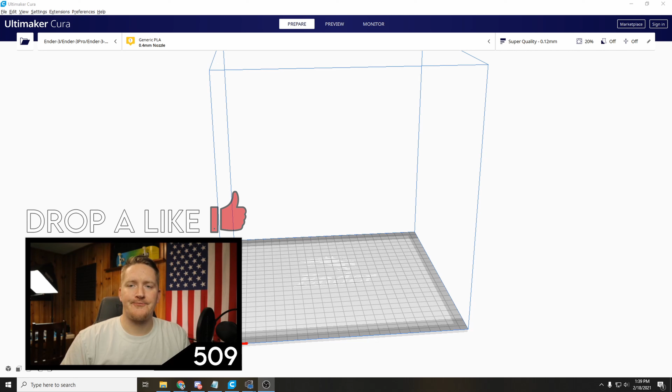This video is geared more towards beginners, people that are just starting out 3D printing and haven't really used Cura. So I'm not going to be going into the technical settings, and I'm not doing a deep dive. I'm just going to show you the basics of how to get going.

If you're brand new to 3D printing, the way it works is you get an STL file, which is a 3D model or 3D print file. You bring it into Cura, a slicer program, and Cura slices it into a gazillion little lines basically, which creates a G-code file. Then you take that G-code file and put it onto your 3D printer via your SD card, and that's how you make a 3D print.

So Cura is the slicing software that we use. It's a very popular software. There are other slicer programs out there, but this is by far the most popular one, so that's why I'm going to be showing you this one today. We'll go over the basics.

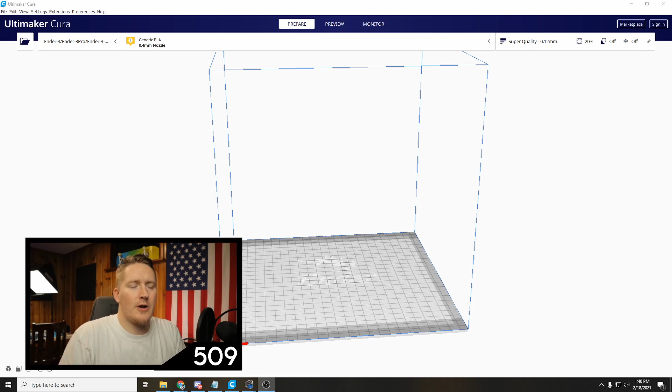The first thing you want to do, if you don't already have it downloaded, is download Cura from their website. It's right here, I'll have this linked in the description as well. It's called Ultimaker Cura. The most recent version as of recording this video is 4.8. It's good to stay up to date on the most recent version, because they're always adding extra features and updates and things that are definitely needed.

After you have it downloaded, I've already got it downloaded and installed. This is what it'll look like when you open it up. You'll more than likely have to set up your printer first too, so it should take you through a walkthrough process. But if you haven't done that yet, you click right here, click Add Printer.

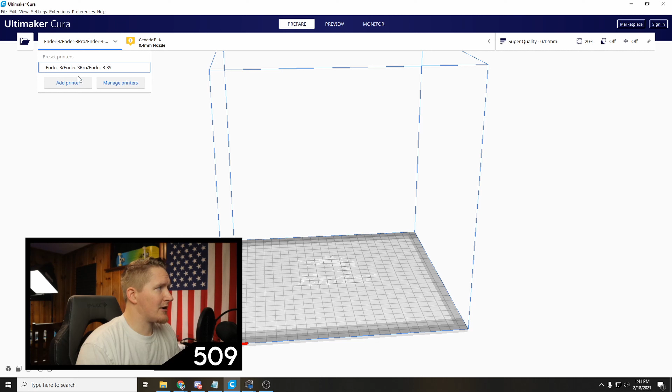Right here, you don't have to add it to the network. On the bottom tab, add a non-network printer. We can dig through this list and find it — there's a gazillion different brands already made out. I'll show you for Creality, the Ender 3 V2.

There was the Creality, I just saw it right there. So find your Creality, Ender 3, Ender 3 Pro. If you're using the Ender 3 V2, this is most closely associated with the Pro, so go ahead and select that.

We're going to call this Ender 5 actually, because I already have a 3 in here. You can change the printer name right here, so we will call this Test Printer. You can name it whatever you like. Go click Add, and it should have a few more settings.

If you selected your correct printer, it's going to have the correct dimensions already put in here. So this is the correct bed width and height and whatnot. It's rectangular, this is all set up correctly already. The extruder, the filament is 1.75.

Does it have a nozzle size in here? I don't see the nozzle size. The G-code flavor is Marlin. Yeah, that's correct. So if you select your correct printer, all of these settings will be correct. It's got a heated bed.

If you did not find your printer on the list, say you have a printer that's not as popular, and you couldn't find it in that list, just Google your printer settings — the printer bed size, their build plate, if it's a heated bed or not — and then enter those settings. But if you found your printer on the list, which you more than likely did, it's already set up. So you click Next, and now you're in Cura.

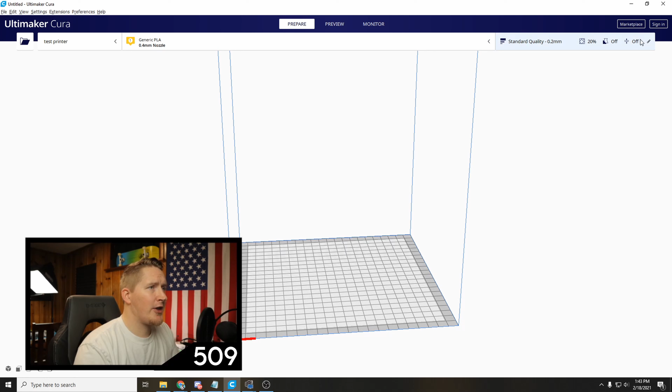The only thing I ever change is my settings over here. So we have our printer selected here - that's my original printer, and this is the new one we just made. If you have multiple printers, you can see them listed there.

This is your nozzle size and your material selection, so you can go in here and select the brand of filament you have. It's best to just leave it on generic PLA and set your nozzle size to the right size.

In Cura, up here in the settings, this is what it's going to look like for you for the most part when you just start off. If you're just starting off 3D printing, it's already a lot - there's a lot going on, very overwhelming. Cura does a good job of having these settings already pre-set up pretty good. You really don't need to tweak them until you get the basics figured out and understand how everything's working. I'd honestly recommend just leaving it like this.

So the profiles here, this is basically your quality. The higher the number, the larger the line width is. This makes your prints bigger, the detail is less noticeable, and it prints faster - it won't take as long.

The lower you go, the higher quality you get. So if you're printing something small, like a miniature for Dungeons and Dragons or something like that, it's totally fine to use a small nozzle resolution - excuse me, layer height - a small layer height, because you're going to get more detail out of it. It doesn't really affect the print time since it's going to be quick anyways. You're not looking for a giant print to take forever.

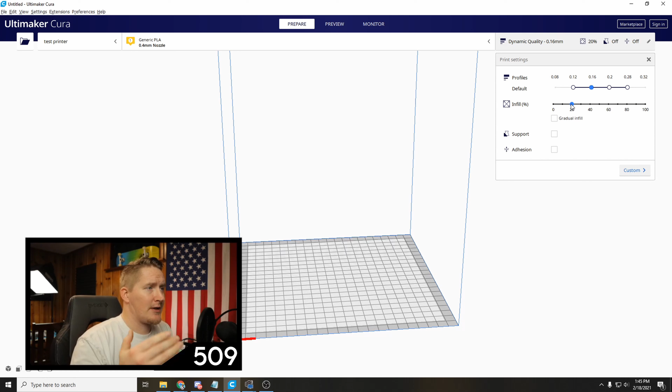So if you're just starting out, 0.16 layer height and 20% infill is totally good. Then comes the question of supports.

If you click supports, this is going to basically - well, I'll show you that in a second here. So if this is what you like, let's grab a file.

If you haven't downloaded something yet, we would go to Thingiverse and search for what you want. I've already searched for a calibration cube - this is a good thing to print right off the start. You click download files here, it shows you a little advertisement, and after 5 seconds it starts downloading this.

After it's done downloading, we click on the download - oh, my camera's in the way - click show in folder, and I put it right here. I'll right click and click extract all, extracting it right here. This brings up this, which is what almost all files look like when you download them from Thingiverse. You open this up, and this is your calibration cube.

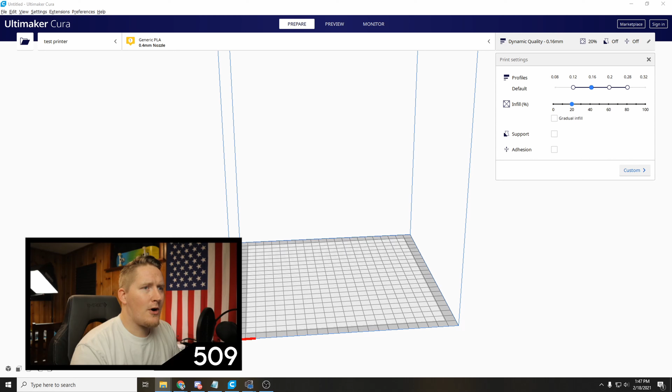I'm going to move this off my screen and bring Cura back up. All I'm doing is dragging the STL file and dropping it inside Cura, and that automatically loads it in there. Now you can see we have the option right here to slice the file. We would set - you can use your mouse wheel to zoom in and out, and right click to spin around the object.

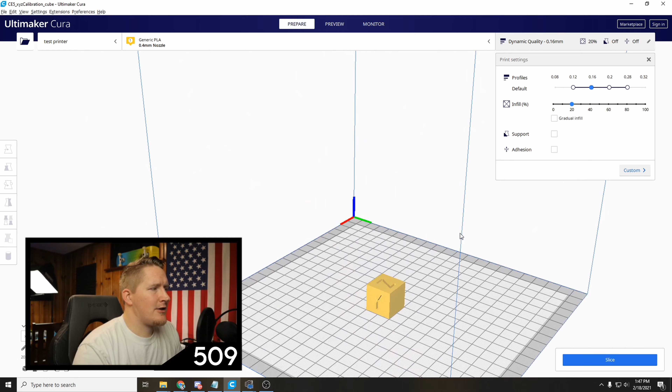And that's basically it. You can hold your mouse wheel and drag side to side. So say we're going to print this test cube. I've set it to 0.16, I've got my infill set to 20, and there's no supports needed for this, so we're going to leave supports off.

You would click slice. After it slices the file, you can see it tells you the time, how long it's going to take here, how much filament it's going to use. Well, excuse me, you have to set this in your settings if you want to see how much filament it's going to use, so I'll show you that real quick as well too.

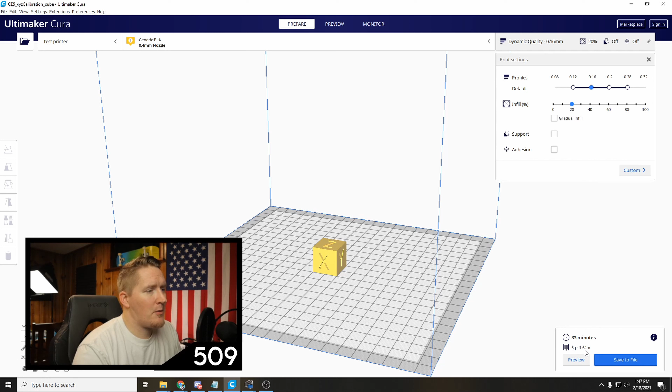So if we go to settings, configure settings visibility, profiles, no, where's it at? Materials, excuse me, here it is. So we go settings, configure settings visibility, materials.

Under materials here, you can set what the filament, it looks like it's got a default in here. Oh no, I didn't update this, excuse me. So it's already got a default. I just recently switched to 4.8 Cura, and it looks like it erased all my information in here. So you can change your filament cost.

I believe you can change this to dollars. I could have swore I have in the past. It's set to euros right now. Anyways, you add up your filament weight.

So you'd say a roll of filament, 800 grams, I think. Why isn't it allowing me to change it? There we go. So a normal big roll of filament is 800 grams. I don't know why it won't let me change those settings. Huh. You can change these, I'd have to mess with it for a second.

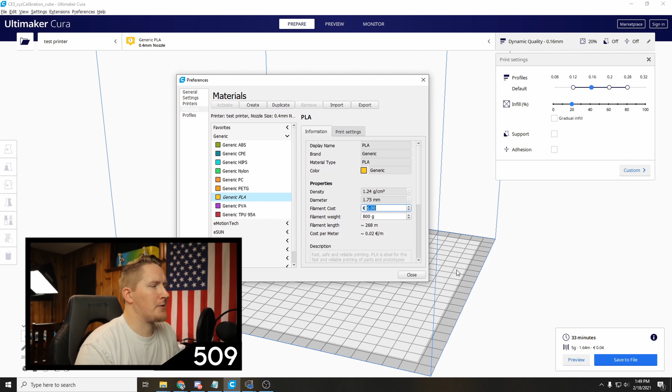That's not what this is about, sorry about that. You can change these settings though, and it'll give you an accurate representation when you slice a file down here of how much filament it's going to cost or take, the amount or the length of filament.

And then what that costs to you. So basically, you buy a roll of PLA, you figure out what it costs, what the weight is, you enter that information in your settings there, and then this will give you an accurate representation of what that's actually costing you.

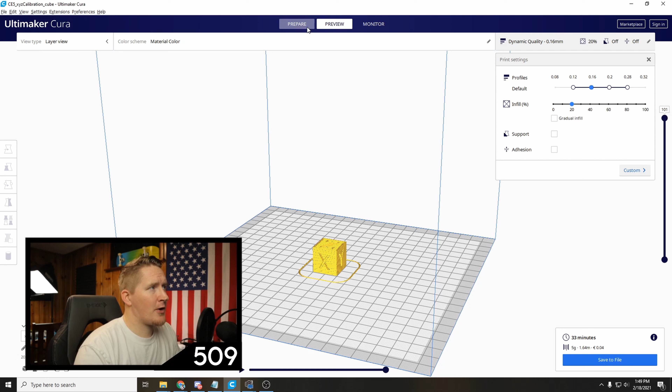So anyways, we've sliced this file, and we click on preview, and you notice up here it's changed the menus that we have. So prepare allows you to mess with the settings and change it. Preview obviously is what we're looking at now.

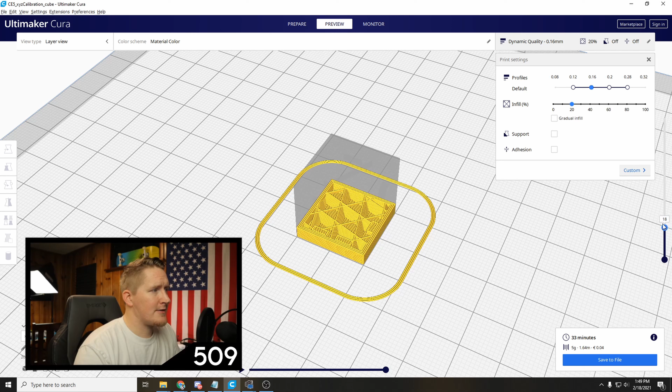So in the preview, you can see I'm using my mouse wheel to scroll in. Over here on the right hand side, you can see how it's made. So it starts off on the base, it prints up. You can see that we have 20% infill, so 20% of this, the center, is filled. And then it goes all the way up.

You can click the little play icon and it shows you what that specific layer is doing, how it's making that layer, and so on and so forth.

Anyways, now you would click Save to File. And if you have an SD card already inserted in your computer, you should have an SD card put in your computer before you're ready to slice. The option will just be to save to SD card. You can save it right to your removable drive.

If you're using Octoprint like I am, I just save these to a folder here on my computer, and then I upload them to Octoprint. That's for a different video. Most people, if you're just learning, you're going to be using an SD card still. So you save it to your SD card, you take it over and you put it into your printer and print.

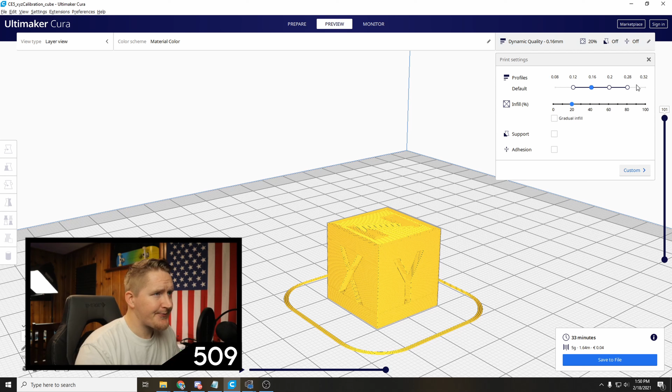Back to the settings a little bit. If you want to use the custom settings, if you click custom, they're more than likely going to look like this when you open them up. I've closed all my menus already, but normally when you open these up, there's only going to be a few settings in here. The reason I have way more settings in mine is because I've been messing with my settings.

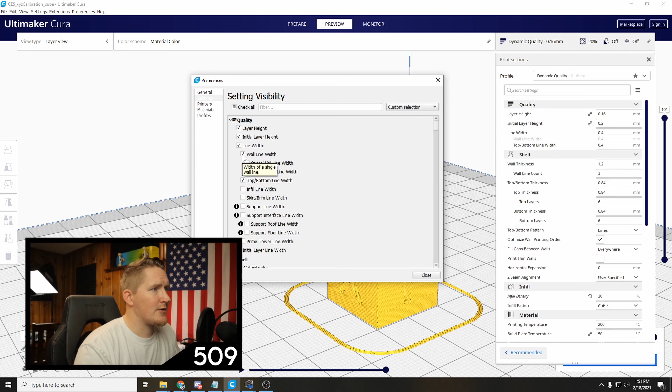To add a setting to this menu, if you're watching a video or somebody's saying try to change this or tweak that setting, you would go under the field that it's under, and you would click on the gear icon, and then under the quality setting, these are all of the options I can add here. So if I click wall line width, you can see it adds wall line width to my menus there on the right hand side. Yeah, that's how you would add a setting.

You can also go up here to the search right here and type wall line.

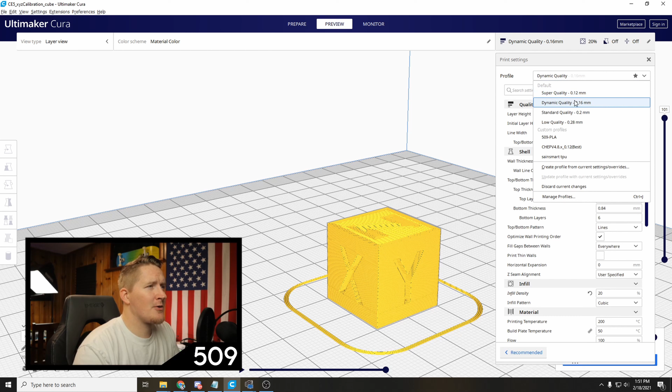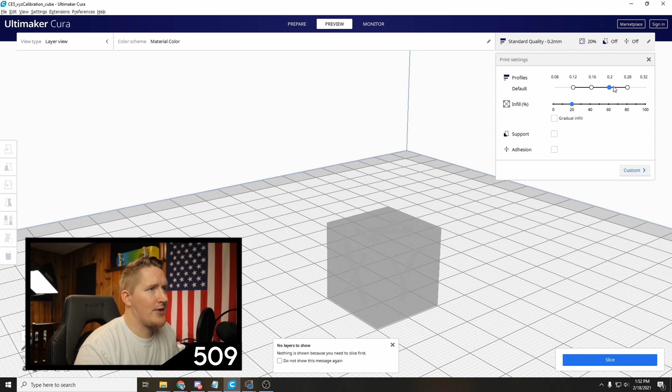Yep, and it pops it up right there. So you can search for whatever setting you want to find, and that'll also bring it up. Also, if you're using the custom settings, they have these pre-built things already: super quality, dynamic, and standard. Those just change the parameters we were already talking about. So you can see super quality changes it to 0.12, standard quality changes it to 0.2. If we go back to recommended, it's changing from super quality right here to standard quality right there. Like I said, I like 0.16, that's totally fine.

But yeah, you would slice this file. If you make a change to your settings after you've already sliced it, you're going to have to reslice the object. So you click reslice again, and then it's ready to go.

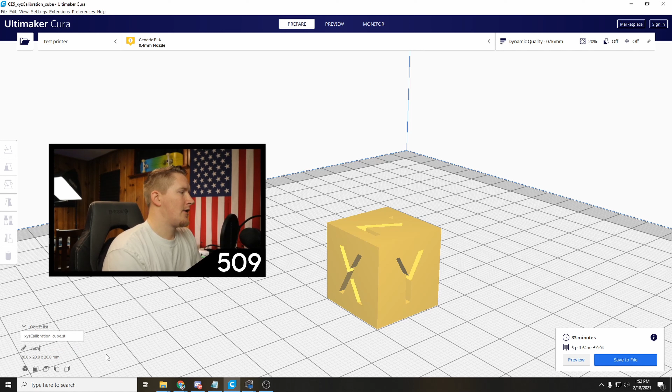You can change the file name too here. Let me move my camera up a little bit so you can change the file name that it saves. So you can see when it imports, it's got this crazy name. We'll just call this cube. So now when I slice this file and save it, it's going to save as cube, so you don't have to rename it if you don't want to.

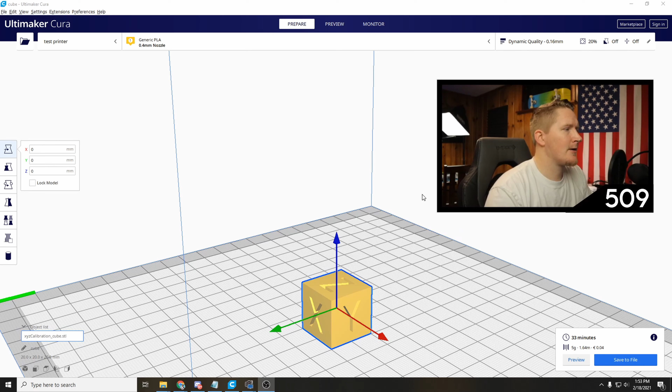Let's see here if we got another. I guess we'll show you these settings now too. So if you notice here on the left hand side, make sure my camera isn't blocking any of this stuff, we'll move that over. So say you import an object in and you don't want to have it there.

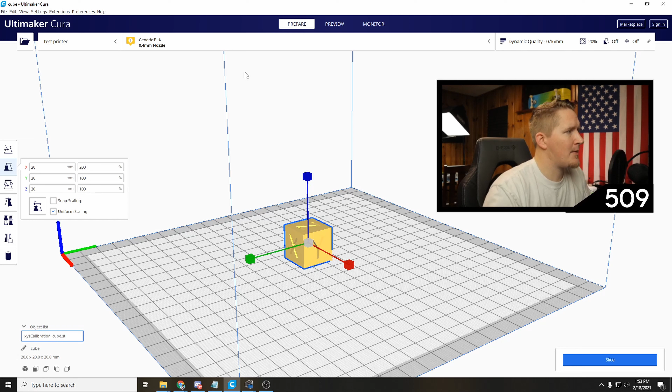Your top option allows you to move your object by clicking on the specified arrows. Your next option is your size, your scale. So right now it's at 100% scale, say we want this at 200%. So we type 200 here, and if you hit tab, it'll automatically insert all of those values for you. So now we've just massively increased this cube.

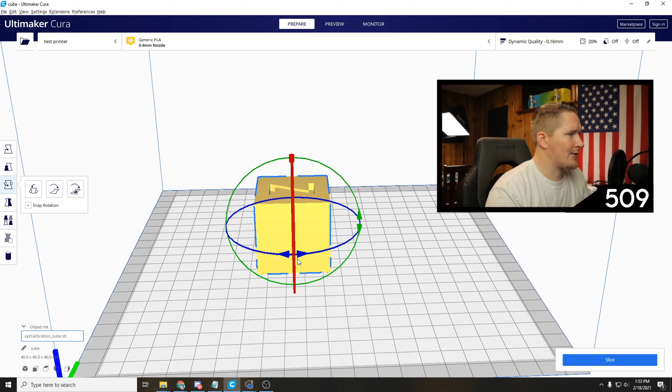So the next option allows you to change the way it's facing, or spin it, or rotate it, whatever you want to call it. So right now the X is facing forward, we can spin it here if we want the blank side facing forward, or one of the other back sides facing forward. We want the Y facing, sure.

The next option is mirror. This mirrors an object just like it sounds. So if you wanted to duplicate this object and then mirror it—you can't really duplicate and mirror a cube, I guess it's going to be the exact same.

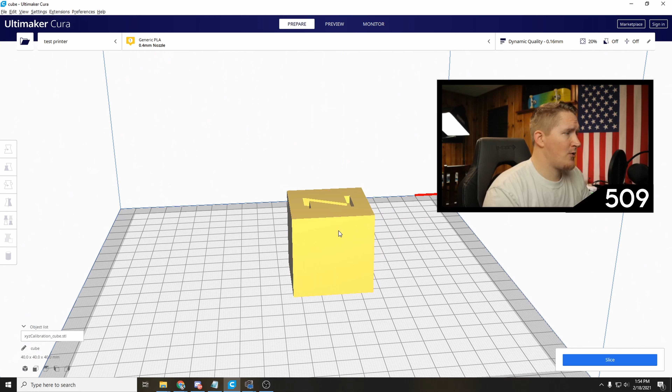But if you right click anywhere on the screen, you can center the object. That'll automatically snap center it to the center of your bed. You can also delete the selected model.

You can multiply it. I use this feature quite a bit. So we'd click on this, right click, multiply selected model, ask you how many times we're going to multiply this. So we'll multiply this 3 times. Click OK, and it makes 3 extra cubes for me.

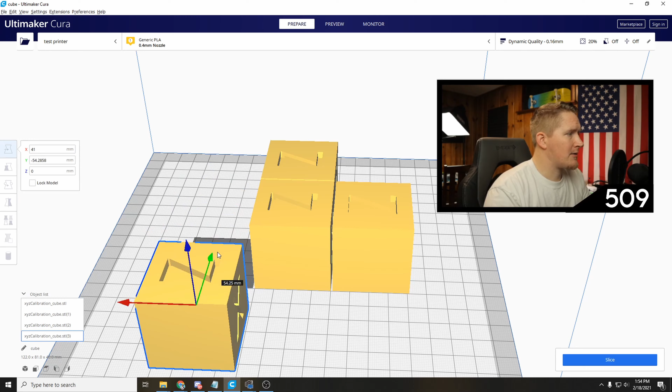So now I can click on that individual cube. I can click on this top menu up here, and I can move these around however I want on my print bed. Doesn't matter where you put them. You can also right click again and click arrange all models, and it snaps them to, I don't know if that's what Cura thinks is the most optimized, but it brings them in all tightly, neatly, puts them in there.

So back to the mirror setting, if you click on one of your objects and click mirror, it asks you which direction you want to mirror it. So if you want to mirror it to this side, to the top, to the left, to the right—we'll mirror it that way, and it spins it to that direction. You can see that it rotated. I don't know if it's hard to see there. Let me see, rotate—whoops. Mirror that way, you can see it's changing. It's mirroring the axis of that.

The next option here is this is for your—what is this—for supports?

I believe this is for adding supports. So if we click on this, there's nowhere to add a support here. Can we do that?

Yeah, it's not going to let me. Let me see if I can. I'm going to click on these and delete them, and we'll bring in a model that requires some supports. I've deleted those, give me a second. I'm going to go into my downloads and find an STL file.

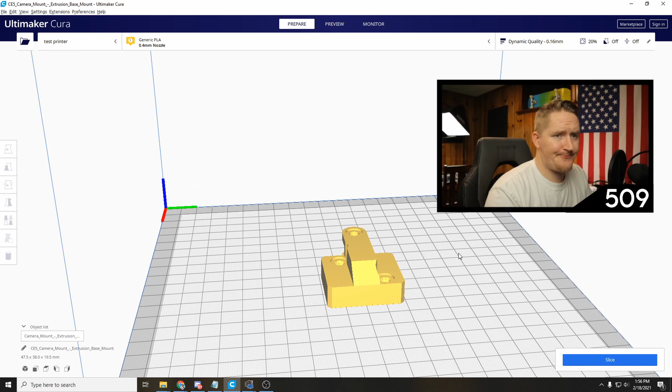What do we got here? Here's one, this is a camera mount, I believe. Yeah, not the one I wanted. So this is a camera mount for adding a webcam to your Ender 3 V2, and you can see here when I spin it underneath, the red area is what's going to require support.

Okay, so if we have support selected in here, we'll go back to recommended. We have support selected here. Turn it on, close this back out, and I'll slice it to show you what it's doing. Click preview, you can see it makes that area filled with plastic with support. As it builds up, it fills it full of support plastic.

Say if we didn't want that, say we know our printer can handle that overhang without support, we click on our object, click support right here, and click wherever you want to put it. So it allows you to put multiple supports.

If you click them again, they delete. If you click on them and go to your move options and scale options, you can move the supports around and scale them however you want, which is quite nice. Then if you click the support option again and click remove, it removes them.

Another really cool thing, this is a plugin, I'll show you how to get this one. It's a supports plugin that basically allows you to create cylindrical supports, and you can put them wherever you want and change the size of them.

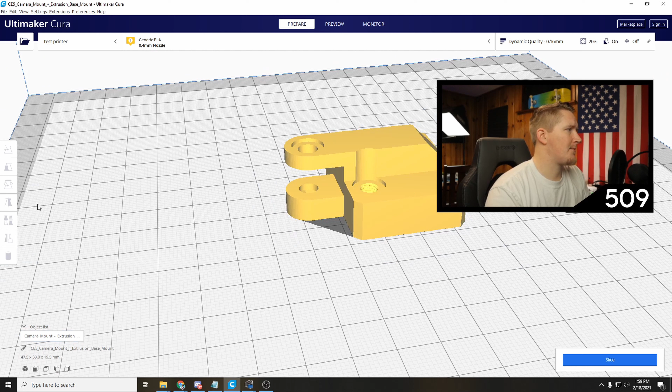I believe that's it though for the most part in covering the Cura settings. This should definitely get you going. Again, there's a lot more to dive into if you want to tweak stuff, but this will teach you the basics on how to get going.